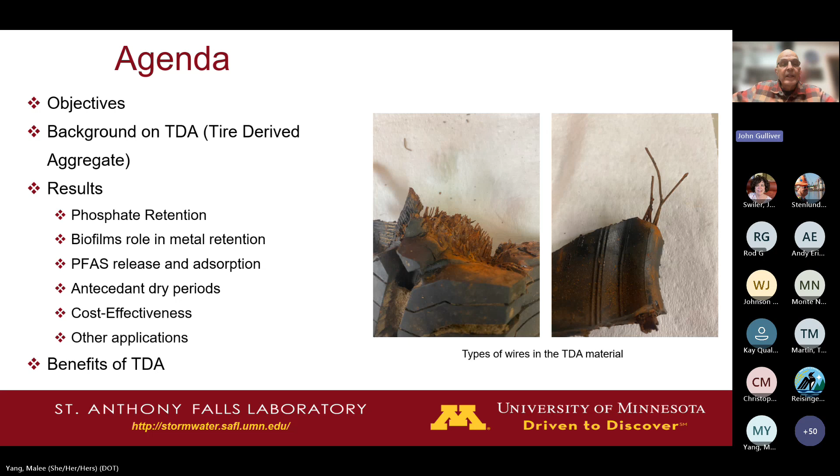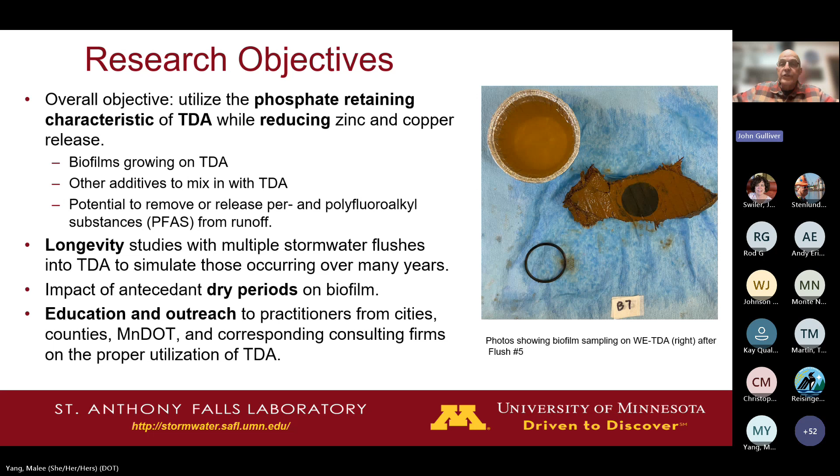So our objectives, we wanted to utilize the phosphate retaining characteristics of TDA while reducing zinc and copper release with biofilms growing on the TDA. They just grow when they're in water. Other additives to mix in with TDA, I'm not going to talk about that today because we didn't need other additives. And the potential to remove or release PFAS from runoff. We did some longevity studies, studied dry periods on biofilm, and then education and outreach, which this is a part of. Next, please.

So tire waste. In the USA, we throw away about 300 million tires per year. And we don't want them to end up in a dump like this here. And so we try to find other uses for them. When I get to it, there's a surprising aspect to the cost effectiveness because most of it is in not sending the tires to the dump.

So it affects the landfill cover because it rises, traps gases like methane and becomes hazardous. And tires also need a lot of volume if not shredded and compacted. So there's a lot of reasons to shred the tires. And then there are good things that we can do with them after we shred them. We can replace aggregate. And then it turns out that they are an aggregate replacement that actually retains phosphorus. It'll collect the phosphate. Next, please.

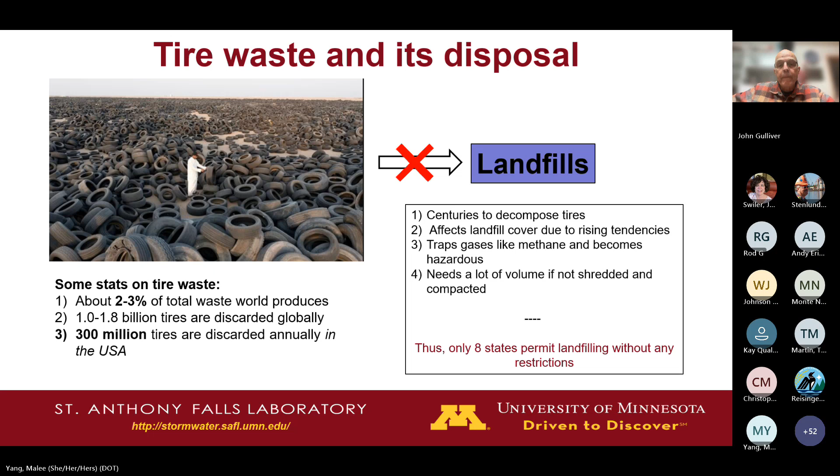So the benefits of TDA placement in underground chambers. They have a high porosity, roughly 50% porosity with tire-derived aggregate. You can see some here at Walters Recycling and Reuse in Blaine. It converts tire waste into a useful resource. It has low maintenance needs because it's underground and there's really not much that can go wrong with it. It's low cost and it's lightweight. These are the advantages that people knew about before this research study. Next, please.

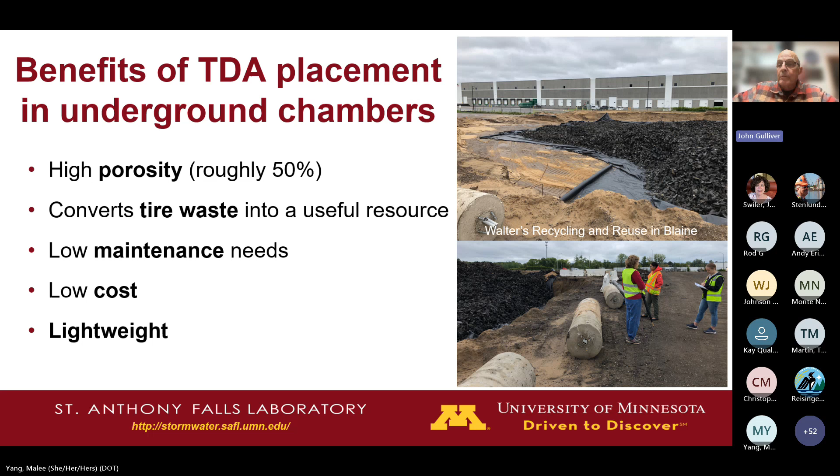The types of TDA studied were really tires chopped into between 2 and 6 inch pieces. You can see some pictures here of the traditional TDA and then a TDA byproduct that we worked with called wire-exposed TDA. There's no use for this TDA byproduct currently, and it's TDA with too many wires poking out of it, and they don't want the wires to be in the TDA mixture because it will poke through impervious films and things like that. So that's what we used. It's normally used in dry locations. We're talking about using it in wet locations, underground chambers to collect stormwater. Next, please.

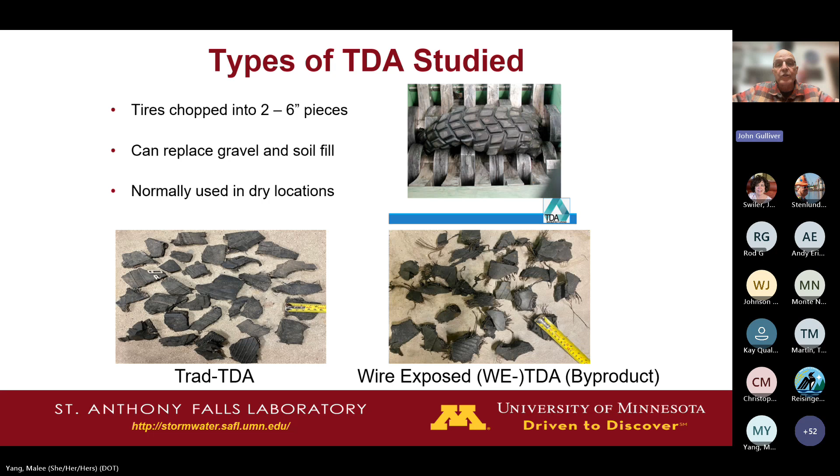So our research results. Well, we had a bunch of buckets filled with TDA, with replicates and different treatments. On the right, you can see TDA in the buckets after a certain number of flushes. So we would put water in the TDA, kind of simulating what happens in an underground storage chamber or an underground infiltration chamber. You put water in, the water drains out slowly, and then it's dry for a little bit. We had 4 flushes on the left of the right-hand set of pictures, 6 flushes in the middle and 10 flushes on the right. You can see how the biofilm is growing. That's basically a slime layer. Next, please.

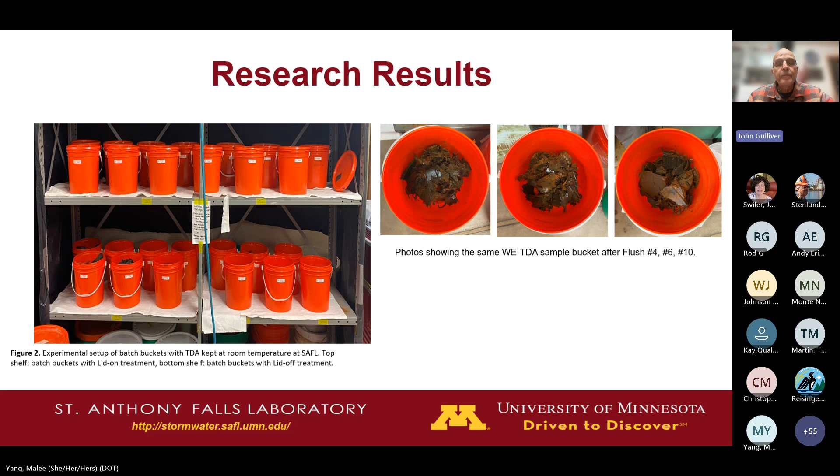So in terms of phosphate retention, we did a pretty good job with our TDA. We put in phosphate, and you can see the controls are at the top. The y-axis is C out over C in, and on the x-axis is the flush number. So we'd put in a flush, and then we would watch it for 72 hours, and then we would leave it for 2 days and then do another flush. So it's a long-term study.

And you can see that the C out over C in is about 0.2 for most of the treatments. That would be wire-exposed TDA and traditional TDA. We did a lid on and a lid off because we weren't sure how much exposure to the air occurs in these underground chambers. So we did both, and they both worked pretty well.

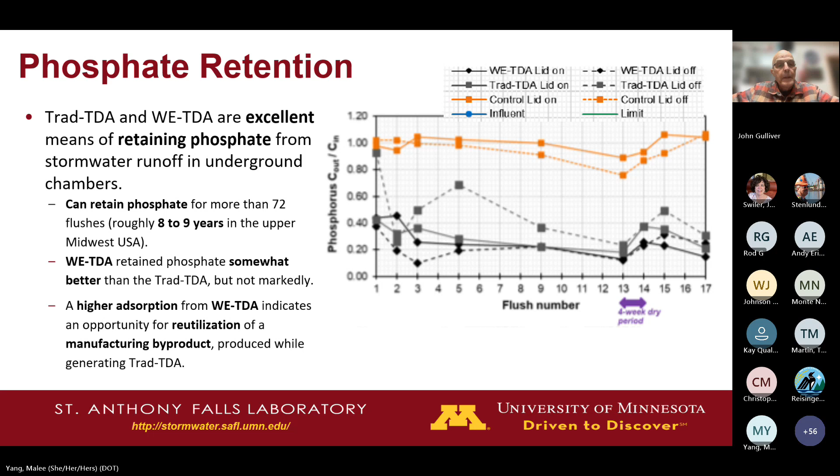The biofilms. The biofilms growing on the TDA will retain much of the zinc, copper, and iron that's released from the TDA. We found in a previous study that TDA can release these 3 metals, but the biofilm growing on them will capture the metals that are released. And so we had virtually no metals in the effluent of these

flushes. And the biofilm growth is a little bit interesting. It's pretty constant between the different flushes. It stays pretty constant. There's one TDA, traditional TDA with the lid off, which has lower biofilms, but then at the end it has the highest biofilms. We did a 1-month dry period. We did a 2-month dry period.

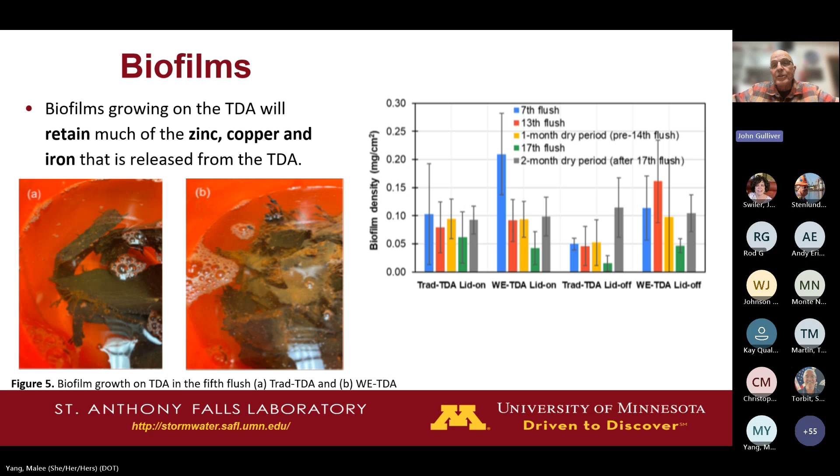The biofilm lives. If you've ever tried to get something out of your shower, you know that the biofilm always comes back. You have to work hard at it. And that's really what this is. It's always there. Next, please.

So the biofilms do a good job. The toxic limits are in green, and the response of the biofilms for the various treatments are in the symbols. And the influent comes in at virtually 0 zinc, but there's no leaching or a very little bit of leaching, a small amount of leaching. Iron probably had the most leaching, but iron is really not something that the MPCA and the US EPA are that concerned with. It precipitates, and it probably comes out as a solid, so it's really not harmful.

But the zinc and the copper are, and they are below the limits set by the EPA and the Minnesota Pollution Control Agency. So biofilms do a good job.

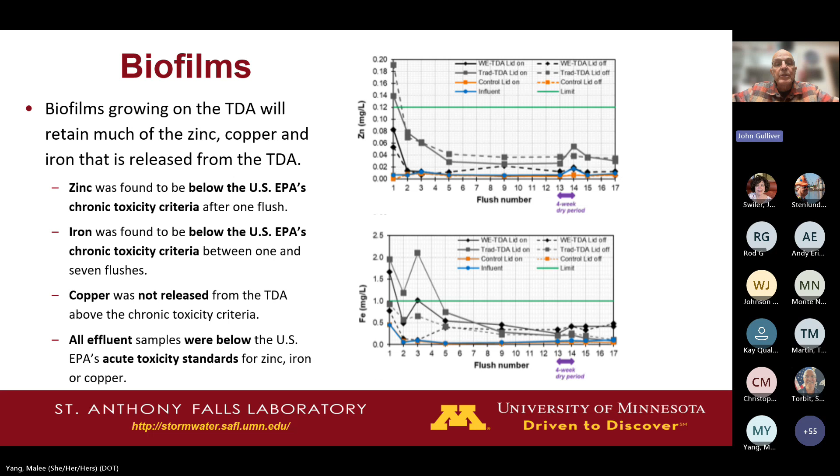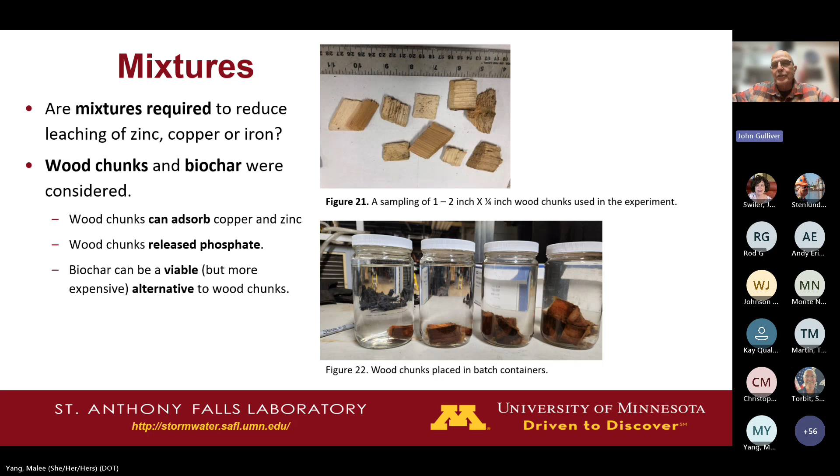Dry periods. The biofilm was not affected by a 2-day antecedent dry period. A 1-month dry period reduced biofilm, but it grew back quickly. A 2-month dry period seemed to increase the biofilm. So there is uncertainty in the response of the biofilm, but it's always there and it's always growing. Next, please.

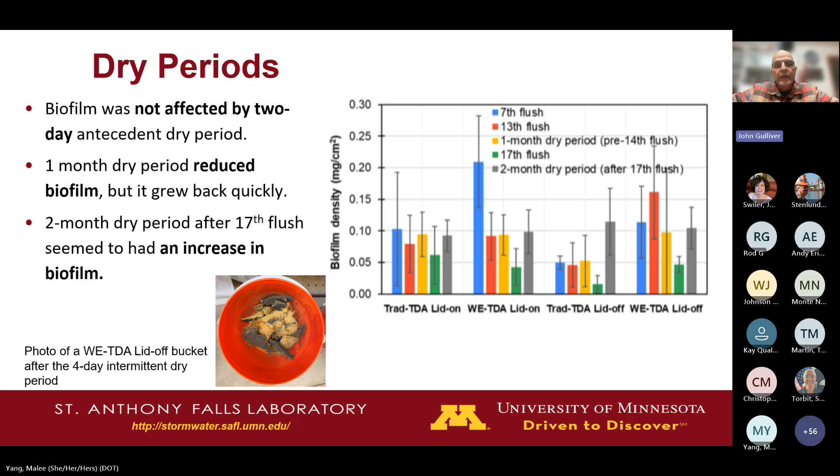Cost effectiveness. Well, most of the benefit is in the fact that we aren't sending the tires to the dump. We're doing something useful with the tires. The value added is $273 per ton. The disposal of tires costs $240 per ton, and we're not disposing of the tires. To purchase TDA, it's actually fairly inexpensive. And you can see it's used here as a replacement for an aggregate around an underground infiltration basin.

And the other thing is that this is one of the only 2 methods out there in Minnesota that can be used to remove phosphate. And phosphate's an important chemical. It's important for us to limit the phosphate release because phosphate is the limiting nutrient for algae in ponds. If you have too much phosphate, you have a green pond, a green lake, a green river, and that's not something we want. And so we want to control phosphate because it's a limiting nutrient.

They have enough nitrogen, enough of everything else they need, enough potassium. All they need is phosphate, and they'll grow like crazy. We don't want them to grow like crazy. We want a kind of a clean water body. The way to do that is to remove phosphate. And right now we can only do it with an iron enhanced sand filter. This is another technique that can be used. So I think that's my last slide.

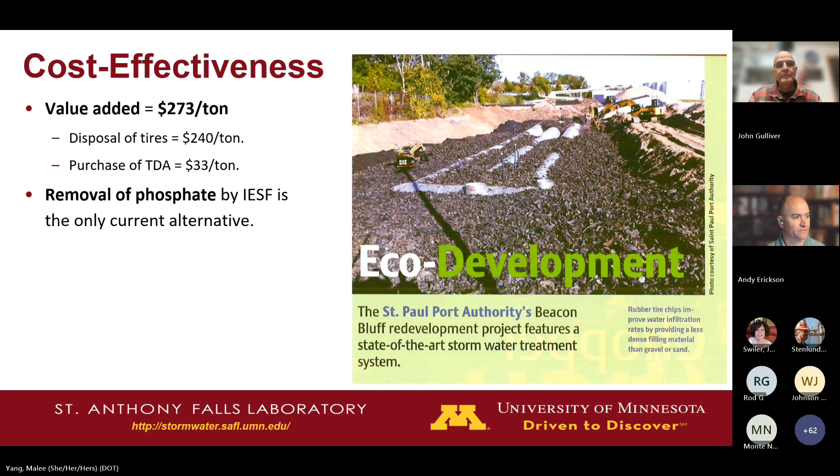I'm going to talk about updating the Minnesota Stormwater Inspection and Maintenance Resource Guide.

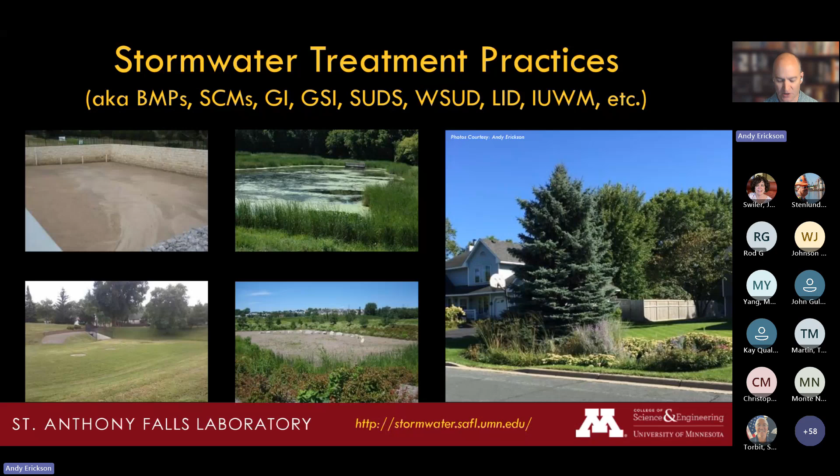But we use a lot of different types of nomenclature in the stormwater world, and oftentimes some are used interchangeably and possibly incorrectly. And that creates a lot of confusion amongst the stormwater professional world. So one of the things we tried to do with the manual that I'm going to talk about is be very clear and specific about what we're talking about. What is a biofilter? What is a bioinfiltration practice? What is a filter? What is a wet pond? What is a dry pond, etc. So nomenclature, terminology is very important in this world.

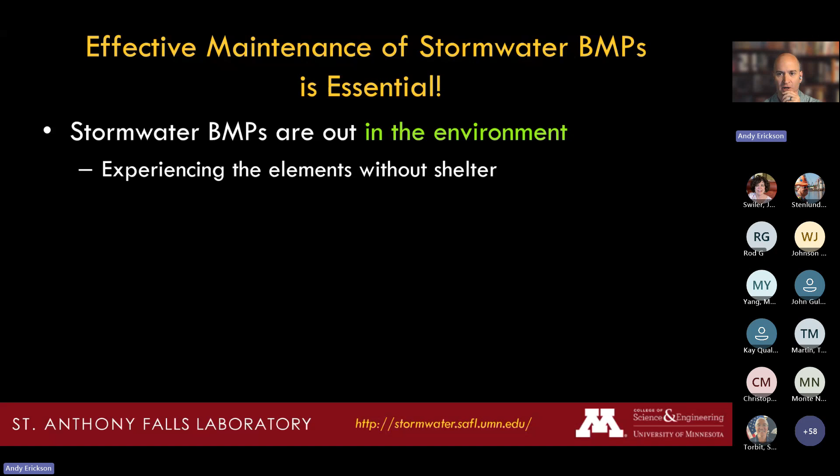And I probably don't need to explain this to this group, but our stormwater treatment practices, or BMPs as they are often called, are out in the environment. They're in nature. They are not protected from the elements. And Mother Nature can wreak havoc really on many of these things. So that is a challenge when we're trying to think about how to keep these practices working long term, and why effective maintenance is essential.

There are many different types of stormwater treatment practices, as I just showed on the previous slide. They come not only in many different types, but many sizes, and the sites into which we install them are all different. So there's many variables that go into each individual stormwater treatment practice, and then the maintenance to keep them functional must be specific to that site and that treatment practice.

And something we rely on pretty regularly is for our stormwater treatment practices to operate independently. These are passive treatment systems. We build them and then we walk away. We let them sit out in nature and they do their thing. They don't have an operator that's standing by. They're not in controlled conditions like a wastewater treatment plant or a drinking water treatment plant. There's not all kinds of gauges and valves and dials we can turn to optimize performance.

They are passive systems installed in the environment in a variety of different ways at a variety of different sites, and we are expecting them to function long term. That assumes effective maintenance. We all know without maintenance, things fail. If we don't maintain our vehicles, they're going to break down. If we don't maintain our homes, things are going to break. The same is true of our stormwater treatment practices.

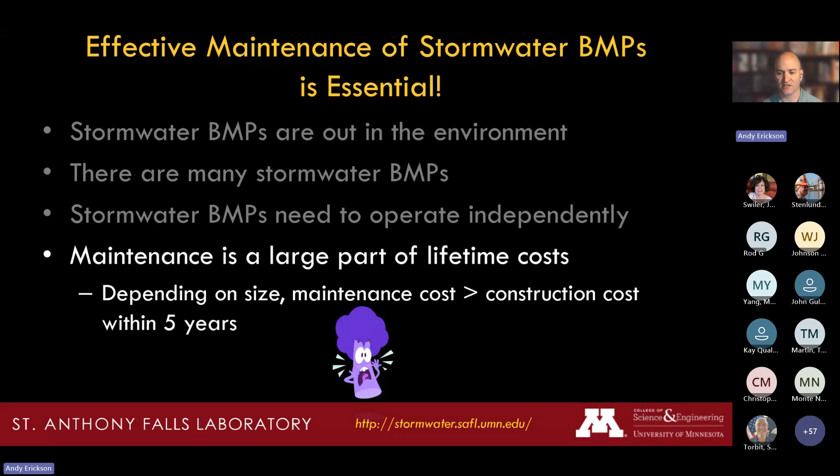But you might ask, why do we need a stormwater inspection and maintenance resource guide? Isn't all of this information already out there? And you might look to the Minnesota Stormwater Manual, which is the standard for design guidance in Minnesota. It also includes all of the regulatory requirements for Minnesota as it relates to stormwater management, and it does include

maintenance guidance. However, some of the feedback we've heard from stormwater professionals and especially MnDOT, who funded this work through the Local Road Research Board, and the Local Road Research Board staff, it can be very hard to find exactly what you're looking for in the Minnesota Stormwater Manual. There's something like 1,600 individual pages of the manual. So when you're looking for maintenance of a rain garden and you're really focused on phosphorus removal, it can be somewhat hard to find that specific piece of information.

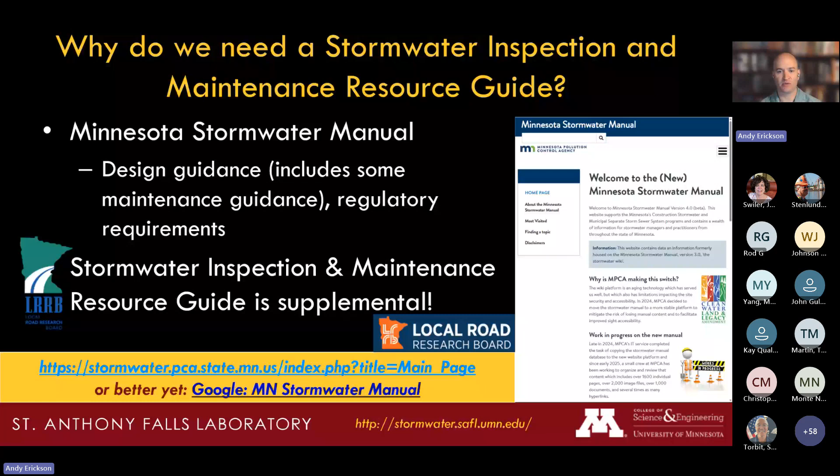And that's why the Local Road Research Board funded a project to build a specific stormwater inspection and maintenance resource guide. And ideally, a clear, concise resource guide that people can use and find what they need very, very quickly. So what is operation and maintenance? And again, maybe this is familiar to you, maybe it's not, but the terminology is important. And that's why we want to define some of these terms.

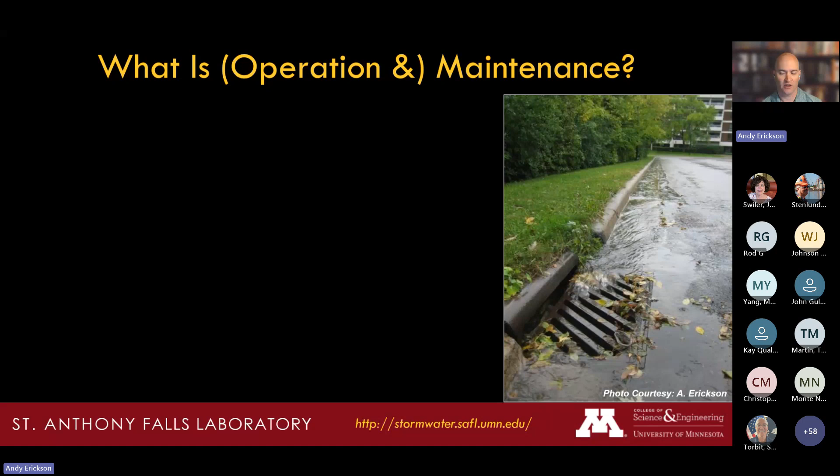When we talk about inspection, we are talking about very quick, simple, visual assessments to select and schedule maintenance. We want to know what's wrong with the practice, and we want to know what maintenance is needed to fix it. That is inspection. That is its purpose. It also is intended to be very quick and simple, and actually low training.

When we get to the inspection forms at the end of this document, you won't get to see the entire form, but we devised these forms so that you could train interns, summer interns, to go out and do these inspections for you and really collect a lot of data very quickly, possibly for all of your stormwater treatment practices within your jurisdiction. That is the ideal, that it's that quick, that simple, and it's a visual assessment.

An assessment actually can go beyond inspection. You can actually do additional measurements to help refine and further select and schedule your maintenance. But you can see that both of these are geared at the maintenance. The maintenance is the key piece because those are the activities that are ensuring the proper function and extending the usable life of our stormwater treatment practices.

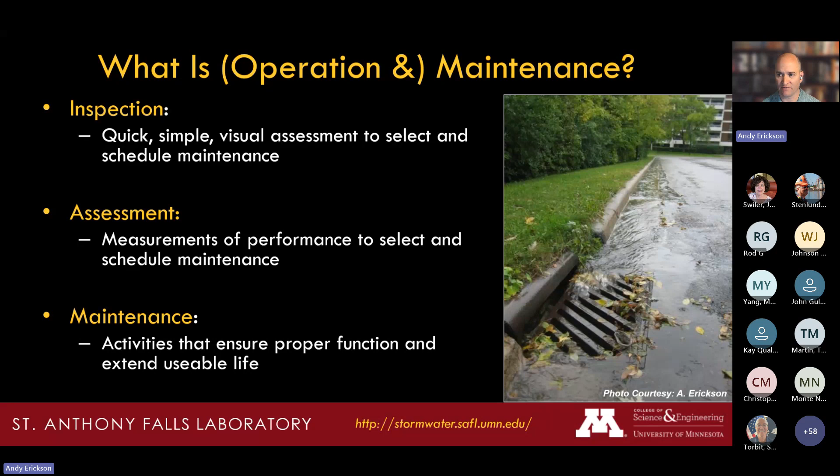So ideally, we can do quick, simple visual inspections to select and schedule maintenance. We can also determine if we need additional, more rigorous assessment, which is a measurement of the performance, to select and schedule maintenance. And then we recommend maintenance to then correct any issues that we might find in order to extend the life and ensure the proper function of these treatment practices.

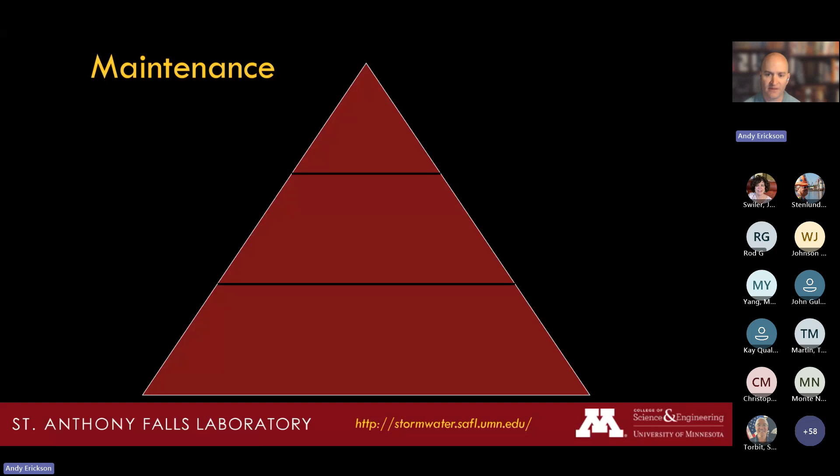Now, when we talk about maintenance, we've broken maintenance up into 3 categories. And I think of it like a pyramid because foundational to all of our maintenance is routine maintenance. This is relatively regular and relatively frequent maintenance. These are things like doing your visual inspections. That should be a regular occurrence and it should be relatively frequent compared to other maintenance that we'll talk about shortly. It might also include litter and debris removal.

It might include vegetation and ground cover management. Again, almost every year the vegetation grows up pretty well and you need to maintain that in order to make sure you have the right vegetation in place, the vegetation is where it belongs and not where it doesn't belong, that the vegetation is not preventing you from doing critical maintenance on your practice. So that is a regular and relatively frequent routine maintenance activity.

But then above that is what we would call non-routine maintenance. These are things that are triggered by specific observations. These are, if it's broke, then you go fix it. And if it's not broke, you don't fix it. That's what non-routine maintenance is all about. It should be, ideally, in an ideal world, relatively infrequent and certainly irregular. We don't expect to do non-routine maintenance every month or every season or even every year. It should only happen when it's needed.

Now, if some non-routine maintenance, such as structural repairs, are needed on a relatively frequent basis and are pretty regular in their scheduling, you might want to look at the cause of that. Especially structural repairs like flared end sections or inlets or outlets or things like that.

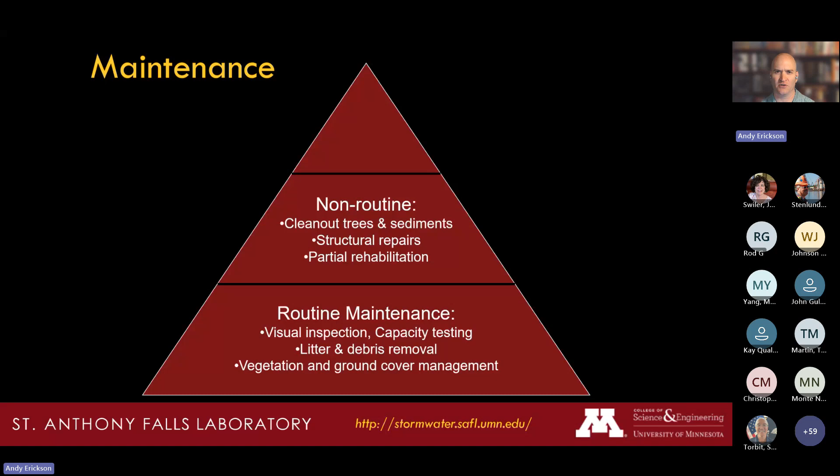If they're getting damaged, if something like that is occurring and you need to do some real structural replacement, look at that and find out why and adjust the cause. It will significantly decrease your maintenance costs if you can focus on your routine maintenance and only do non-routine maintenance when you need it at a relatively irregular and infrequent basis.

When we put these together, we have what we call preventative maintenance. If you're doing your routine maintenance and you're triggering your non-routine maintenance when you need it at the appropriate time, you're not coming in way after it needs to be done, ideally, you're going to prevent the major maintenance, the complete rehabilitation or complete rebuilding of the practices, because this is where most of the cost will come in.

If you have to rebuild a rain garden or a sand filter or even a stormwater pond, it's very expensive to rebuild it because it's a retrofit at that point. The project is done and the contractors are long gone. You have to come in and try to rebuild that practice within this relatively confined, limited space. And that's often way more expensive than the original construction.

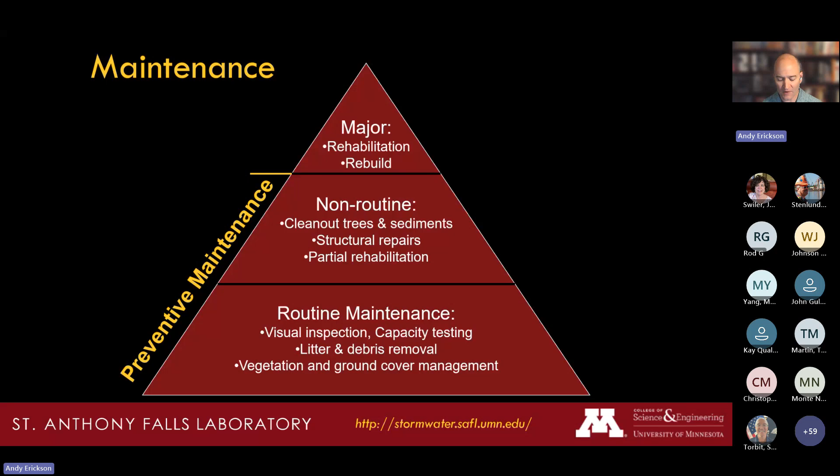So if we can prevent our major maintenance activities by doing our regular routine maintenance and our irregular non-routine maintenance, we're going to save a lot of money in the long run, and these practices will perform more consistently for their entire lifespan. So what did we do with this inspection and maintenance resource guide? We actually have a number of sections in the guide because there are a number of stormwater treatment practices.

We did build upon past learnings and past research that we and others have done, but we also added new practices. Since some of the prior maintenance and inspection guidance has been published, there's some new things going on in Minnesota, and we need to address those with good guidance on inspection and maintenance.

When we talk about ponds and wetlands, floating treatment wetlands are a new practice that's being installed, and people are wondering, how do I inspect this? How do I maintain it? What do I need to know about these that's different than some of our other treatment practices? In addition to our constructed stormwater ponds, our constructed wetlands, those are a new practice.

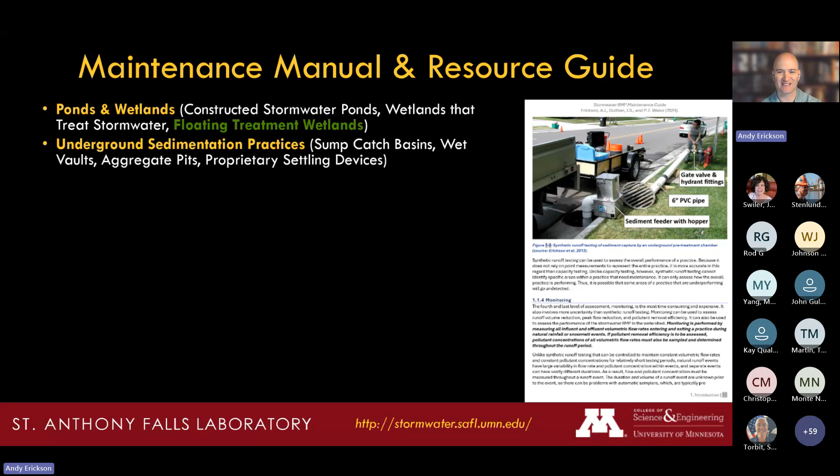When we talk about underground sedimentation practices, things like sump catch basins, wet vaults, aggregate pits, proprietary settling devices, we have inspection and maintenance guidance there, although many of the proprietary products come with their own maintenance guide that's specific to that proprietary unit. Thinking about infiltration practices, things like infiltration basins and rain gardens, the implementation of MIDS has driven, and even prior to MIDS, many of our practices are now infiltration practices, and they need unique maintenance and inspection activities to keep them functioning.

One of the recent advances or new technologies that we're seeing in many of our urban landscapes are tree boxes and tree trenches. How do you inspect those? How do you maintain those? Filtration practices, again, there's been a number of filters, and in fact, we've been using filters for thousands of years to treat water, not necessarily stormwater, but to treat water.

But the more recent advancements are amendments to sand filters. Things like the iron enhanced sand filter or a biochar enhanced sand filter. How does inspection and maintenance change for those amended sand filter products? And what do we need to know differently about those types of practices?

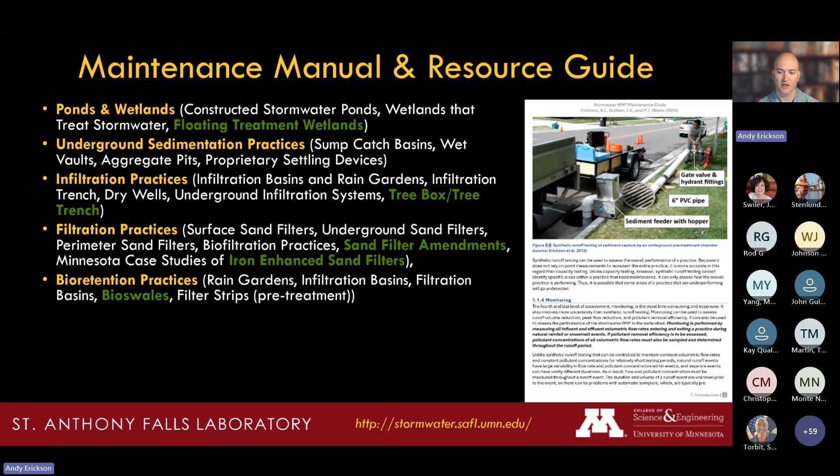Bioretention practices or biologically enhanced practices. These are practices that really rely on vegetation to help with the function. Things like rain gardens, bioswales, even some infiltration basins that are more vegetated than maybe sandier ones. There's a little bit different inspection and maintenance because the vegetation is very important. So we need to inspect the vegetation. We need to select maintenance activities that are appropriate for the type of vegetation that's intended to be there and where it's intended to be.

Full depth permeable pavements. So that's also kind of a category of products that are relatively newer in Minnesota, at least in the last 1 or 2 decades. We have a lot more permeable pavements in Minnesota than we did prior to that. So whether it's pervious concrete, porous asphalt, interlocking concrete pavements, or block pavers, there are inspection and maintenance guides for that.

And another new one is stormwater harvesting. So we are using stormwater harvesting and reuse for a variety of different end uses, whether that's flushing toilets or irrigation. Inspection and maintenance on that is a little bit different. However, many of those are very site specific.

They are designed specifically for that location. And again, many manufacturers or installers will provide a maintenance guide with it, but we have some case studies of what that looks like if you're interested before you make a decision to go that direction.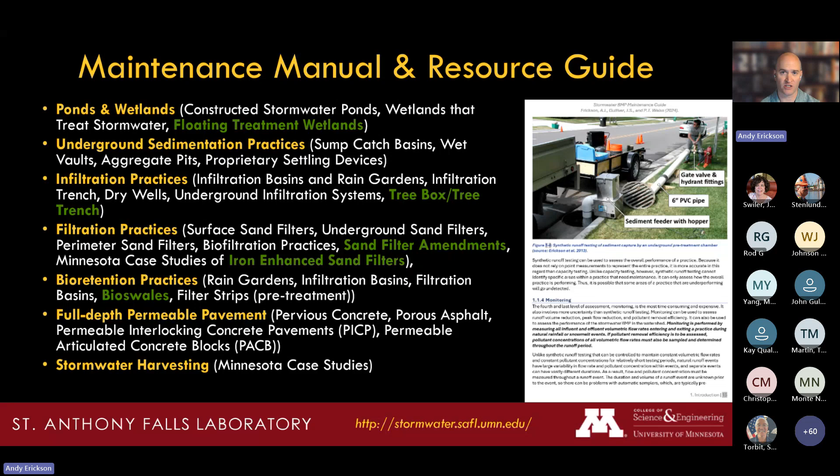Now, in each of those sections, those are different types of treatment practices and how we generally have it organized. In each section, we talk about the benefits and the limitations of those practices. We talk about the different assessment activities. How is visual inspection different? What are some additional assessment methods you might incorporate when needed? For example, capacity testing or synthetic runoff testing or even field monitoring.

We also talk about the factors that affect performance. In other words, what are the maintenance triggers? Why is maintenance often needed on these types of practices? And that is different based on each practice.

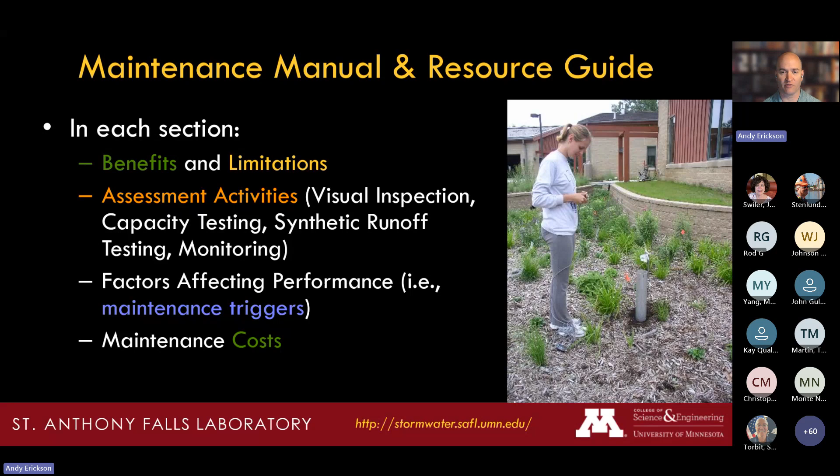And then I think what a lot of people are super interested in is how much is it going to cost? I think a lot of our budgets at the municipal level, even the watershed district level, anywhere that people are maintaining these things, it can be a little difficult to come up with good numbers of how much you think maintenance is going to cost. We've pulled together the literature, we've pulled together the research, we've synthesized that down into some projections so that you can put those into your budgets and hopefully provide plenty of money to do the most appropriate maintenance for your practices.

Another new section in this maintenance guide that's different than other guides is what we call meeting stormwater management objectives from the inspection and maintenance perspective. And what I mean by this is if your goal is blank reduction, whether that's sediment, phosphorus, metals, organics, or pathogens, your inspection and maintenance might be different.

So we have a section on meeting stormwater management goals where you can go in and say, I'm going to look at phosphorus because that's my primary goal in my particular watershed, or for these particular stormwater treatment practices. I'm going to go there, and then this section is going to tell you what you need to focus on in terms of inspection and maintenance for XYZ practices or activities. So a little bit different perspective, but I know a lot of our stormwater practitioners are coming from that perspective. They might not even know how to choose what practice to use. This can help you go that direction as well.

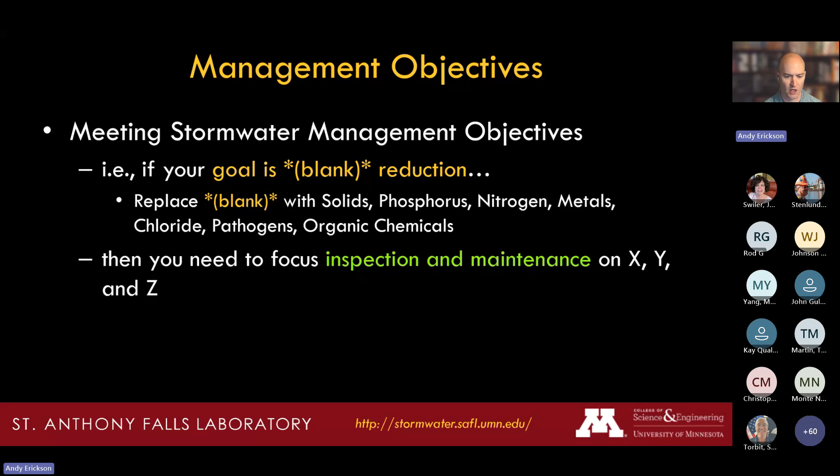So to give you a glimpse of what it looks like, we developed inspection checklists. Again, these have been around. We've revised them and updated them with the most recent state-of-the-art and state-of-the-science information on inspection and maintenance. They look something like this. They are a PDF fillable form. You can print them and write on them. You can have them on a tablet or a computer, and you can type and tap and checkbox to make it work. You can also upload photos and things as needed.

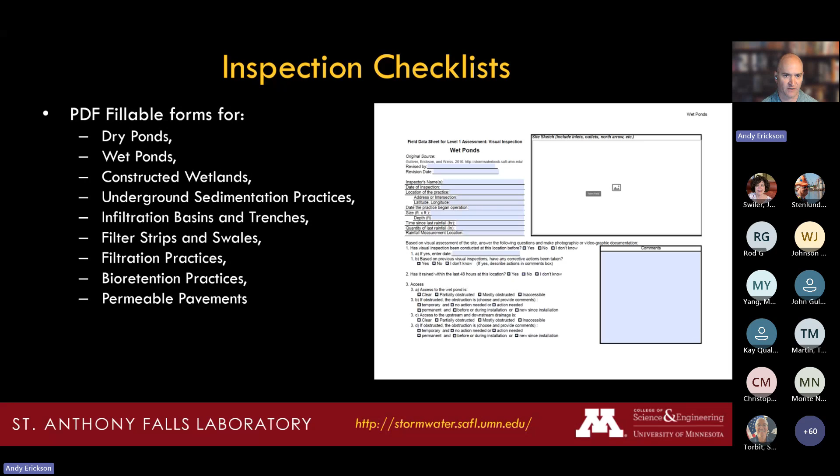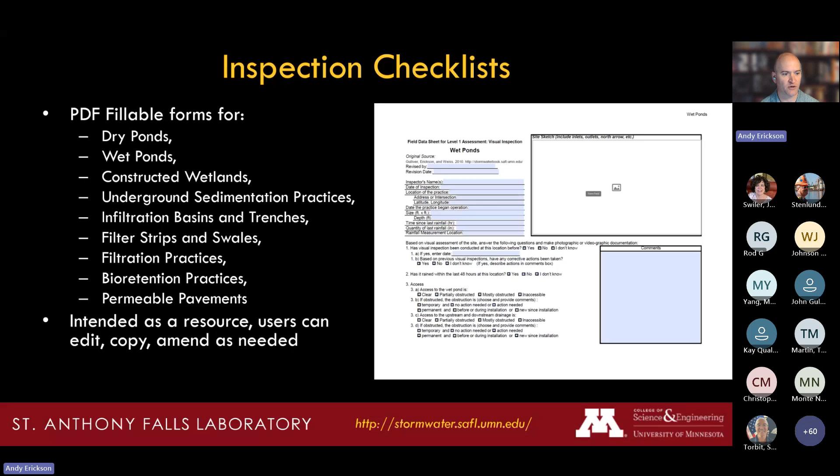And we cover all of these different types of practices. Again, some of the ones we've already talked about before. We have an inspection form for each of these. This is intended to be a resource for you. So if it doesn't match exactly what you need, if you need some other information, or if there's questions here that really don't apply to you, that's fine. Take them out, skip them, add to it. It's meant to be a resource. You are welcome to take them and change them however you need to. All we ask is that you give us credit as we originally developed them, but they are intended for you to use them, and they are freely available.

Going along with the inspection checklist is once you fill out the form, you might not know, well, what do I do with this? I've checked it, I've filled it all out, I've identified all these things. What do I do now? We have maintenance tables, maintenance activities. So for each question in the form, you go to the section in the maintenance table of that question, and you say, okay, I answered this on this question for my inlet structures. They were clogged. We see some spalling of concrete. Then it tells you the maintenance activities to do to fix that problem. So you can know almost nothing about these stormwater treatment practices, and then this literally will walk you through step by step from inspection to recommending maintenance activities.

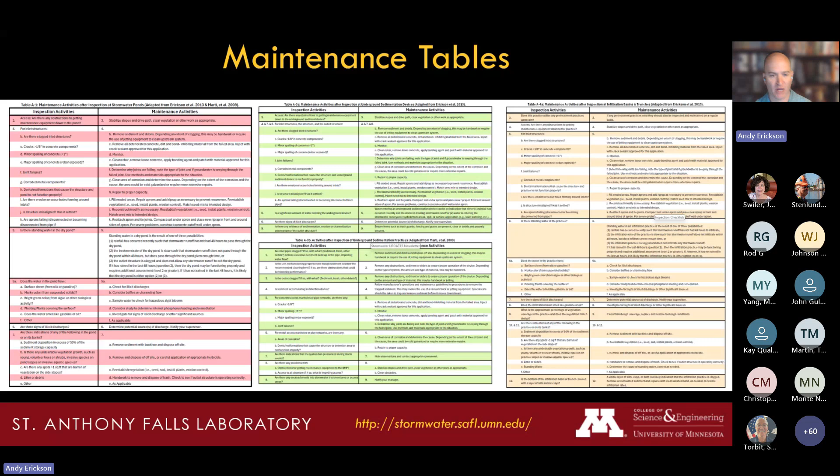We cover a wide variety of stormwater practices. We cover inspection, assessment, and maintenance resources. There are PDF fillable forms, and we talk about the maintenance triggers, the activities, and the frequency and cost of these maintenance activities. So let me drop this link in the chat.

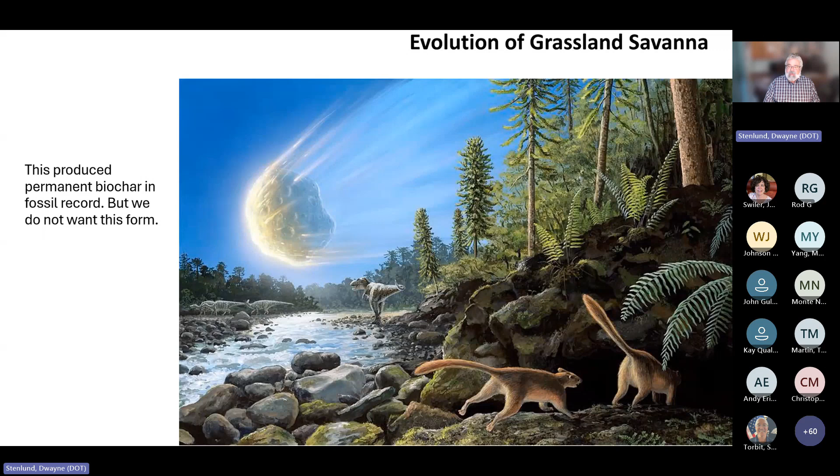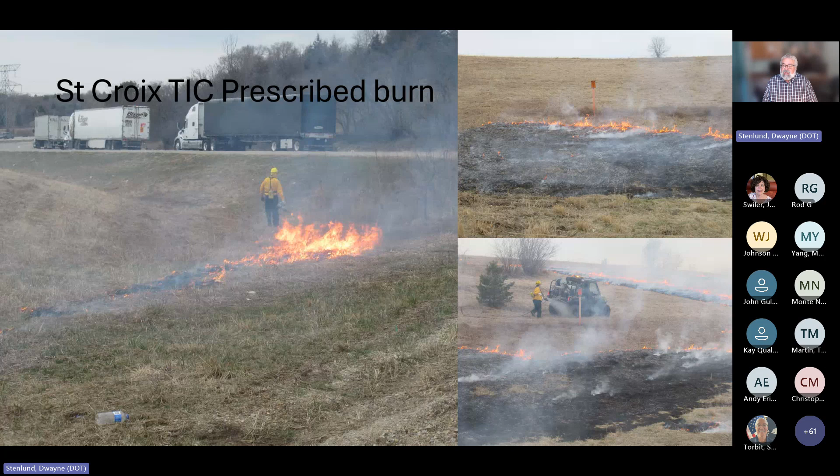So this is just an example of the St. Croix Travel Information Center where we do burn. This doesn't necessarily make biochar, but it does help maintain healthy environments. So if I can't burn, could I add something else that mimics a burn? And that's where the biochars could come in. So what is it? It's basically defined as a thermochemical conversion of biomass in an oxygen-limited environment.

So what you have left is cells. So these would be a great way for making biofilms. This is bacteria apartments, is how I look at it. It will retain water. It's good for heavy metals. I'm hoping that it'll be good for 6PPD-quinone, the quinones off of tires. We don't think it does much for phosphorus. We don't think it does much for PFOS, but it still might create the environment.

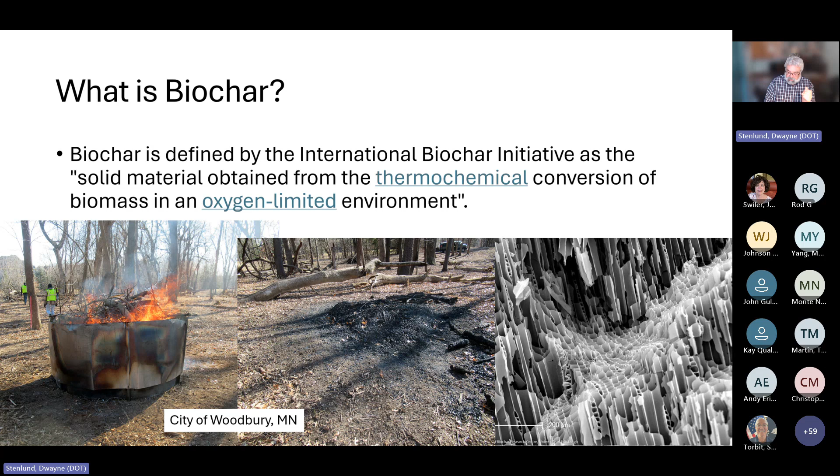So this is in the city of Woodbury. We know an awful lot about this. You can make them yourselves. Instead of having campfires, have a biochar fire. And the city of Minneapolis is in construction right now to deal with some of their wood waste material. It's currently in construction. This is the Gopher Stadium, and this is where the facility will be located.

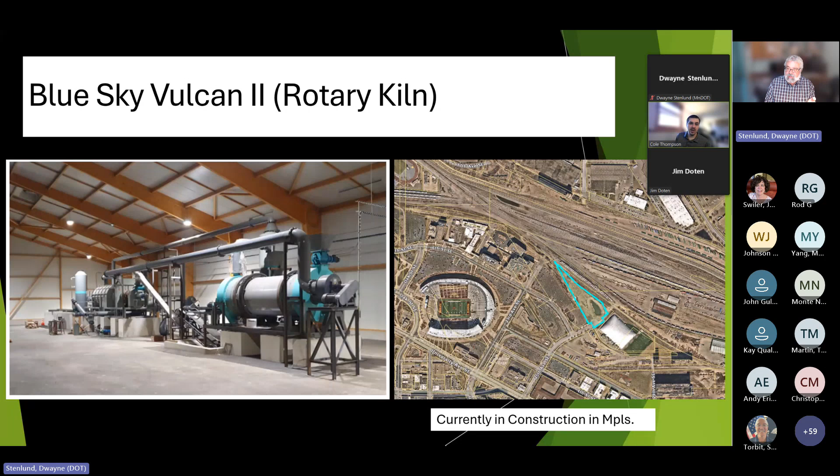And I think it's really important that they're creating a system that they hope to use all the material that they generate. And there's a value for this. Just an example of the equipment, it's not a big deal. This is something I saw at the Biochar conference. This can produce 12 tons an hour. And why is this a big deal?

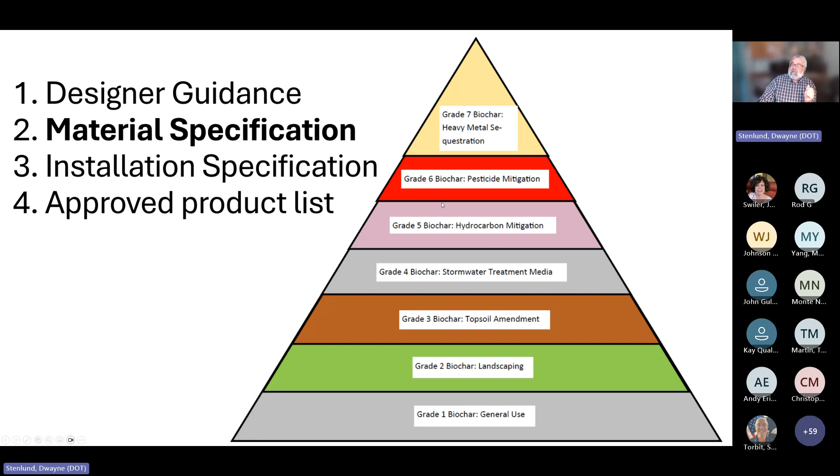Well, I need to make sure that I have standards. And I don't know exactly what it'll look like in the future for the standards material specification, but I hope to be able to use it for general use, and that would include carbon offsets during construction, landscaping, topsoil, stormwater, certainly hydrocarbon mitigation, heavy metal sequestration, a whole bunch of really neat things. That's why this is really quite exciting to me.

So the first round of research, called phase 1, was to basically characterize the char. Because right now, anyone can say anything about anything and say, nope, mine is 600-degree char, and they don't really know. So this is a way of defining certain temperatures and verifying that the material works as stated. Because we need to solve a problem, and it can't be just because someone wants to sell it to us.

So I really am trying to use local materials. That would be black ash, hardwoods, but it doesn't mean softwoods can't be used. And by the way, it could be used for just about anything organic, whether it's agricultural waste or waste that would normally go to a landfill that would produce methane and other materials. So we are hoping that we can generate something. But I'm starting off with hardwoods because it's really complicated to look at all biochars and say they're all equal. And that's the whole point here.

So these are some of the things that we're really trying to figure out: how do you have a product that you can test and have a uniform product that will perform in the way expected by the owner. The designers and the construction can install it. Construction can make money because we are a capitalistic system, and it can be measured by those that are out in the field by inspectors and engineers. So we want to make sure that we have a uniform material, that we have as large of pores as possible, and something that people can make on our behalf.

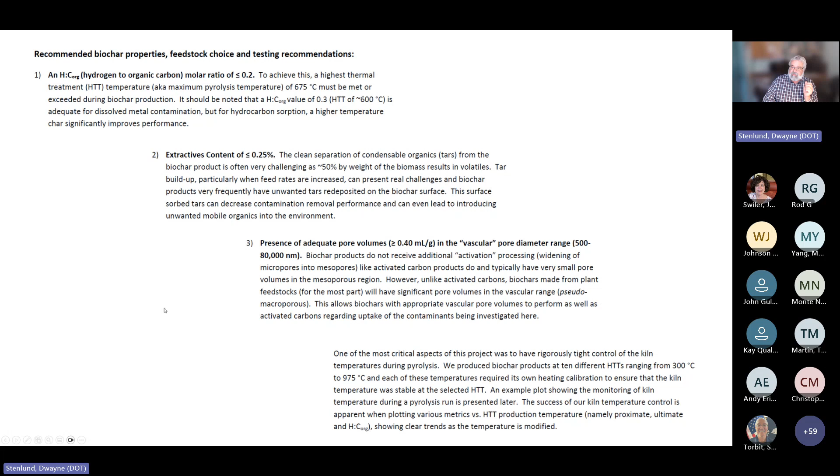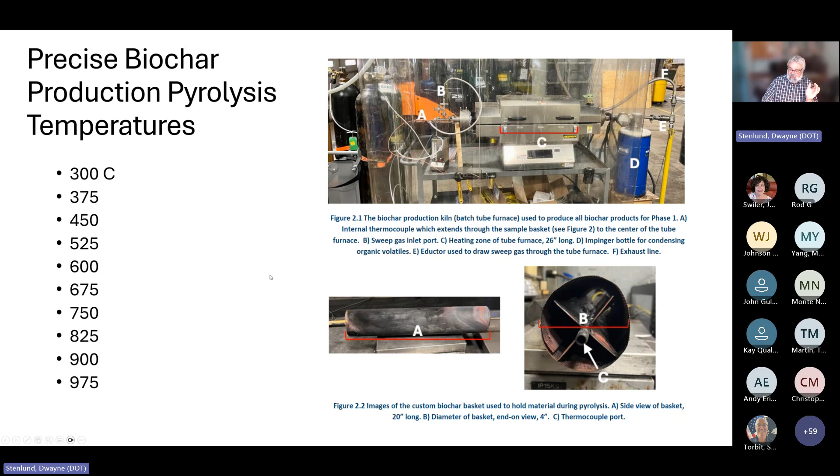So the research in a nutshell is we looked at a whole bunch of different temperature ranges looking for the optimum material. So this is a very precise biochar production system up in the Duluth, Hermantown area. And these are the temperatures. So we're really trying to find the right temperature that gives us the maximum values for solving something.

So we really want to make sure that we have, this is other research, but the idea that you have certain pore sizes that help us to, again, store heavy metals. Again, it doesn't do much for phosphorus, but it may do an awful lot of other benefits for rhizosphere organisms and so on.

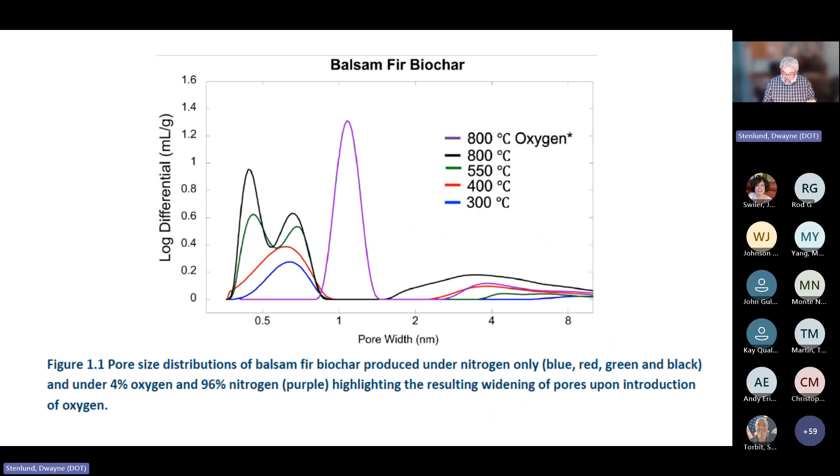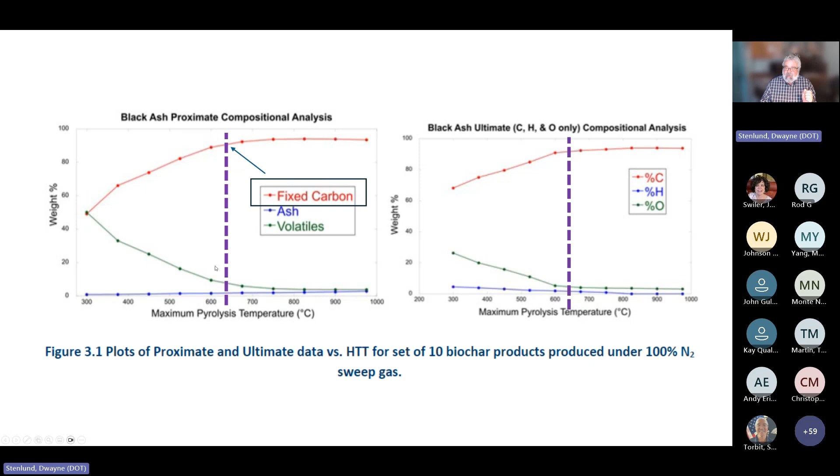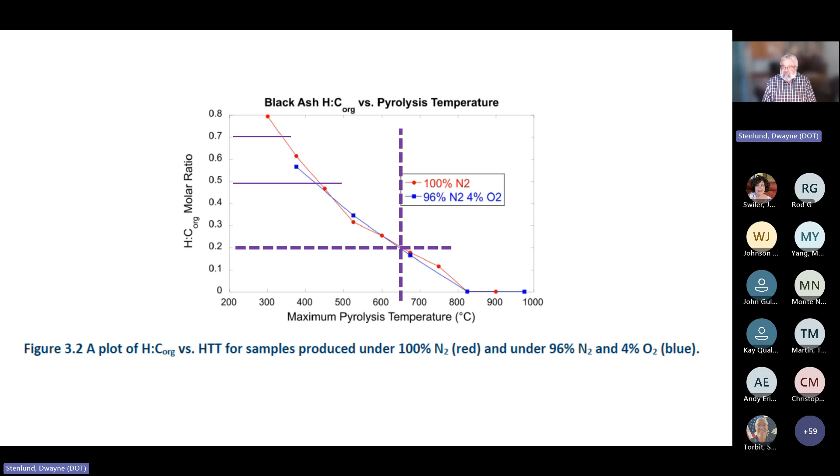So we're really looking for this value, and I'm going to start looking at 650 degrees because in almost all cases from the research, we want maximum carbon, minimum ash, because ash is a liming agent. That's not what we're looking for. So again, I try to put these numbers on the graphs of the final report of phase 1, and it really looks like 650 is coming out as basically a perfect temperature for a lot of different reasons.

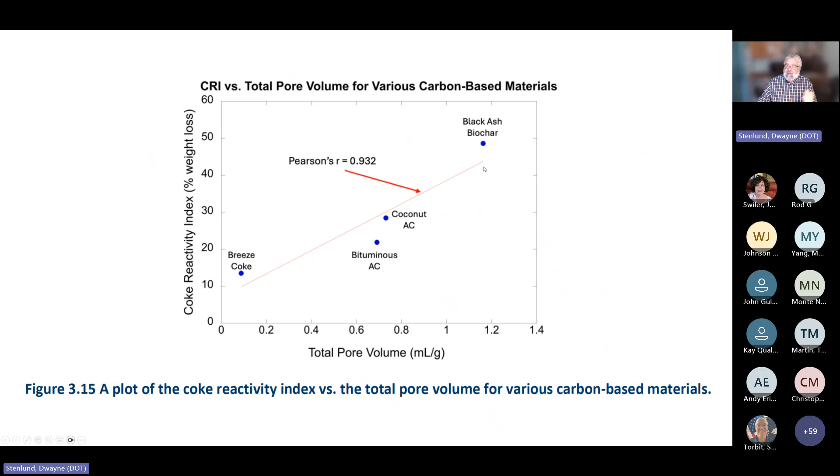And we don't know where all these other chars from agricultural materials, railroad ties, you name it, where they fit in this line. But we know black ash gives us a very good total pore volume. And this is why we're looking at hardwoods right now, because there is a black ash problem. And the data doesn't really matter, just that 650 comes out as a really good number.

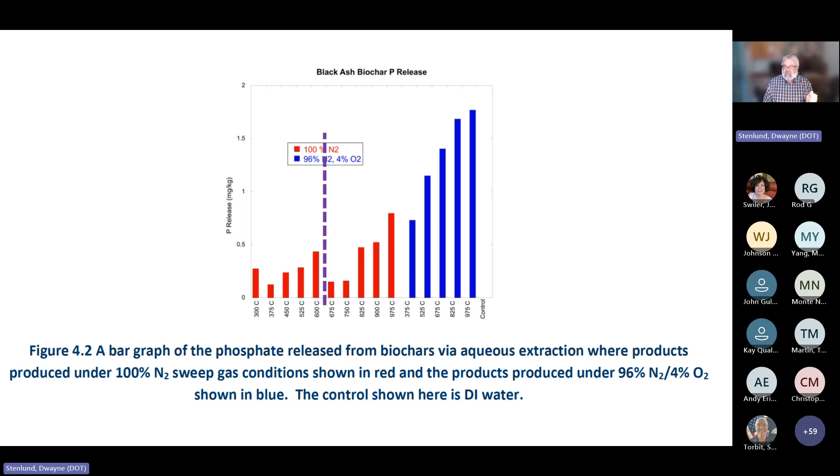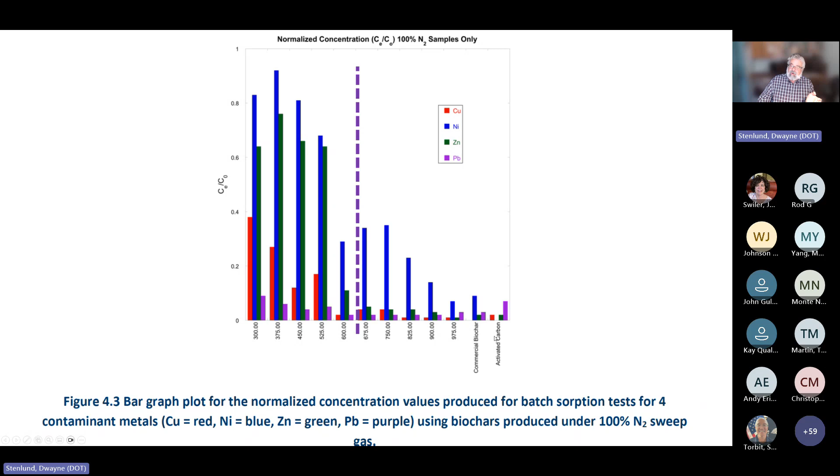And again, for water holding capacity, I believe this is carbon to carbon organics, but we're really looking at trying to make sure that we can get certain metals, copper, nickel, zinc, lead, and I'm looking at arsenic and other materials that will have maximum removal. So it's clear that not all metals react equally well to various temperatures or pyrolysis temperatures. And again, our goal is not to use activated carbon. That's certainly a benefit, but we're trying to use resources that we have.

Phase 2 is going further than that, and now that is to try to design gains. So phase 1 is to develop the material spec. Phase 2 is to find out does it really work, and then develop the design manual. So that's phase 1, phase 2. And this is what I've already developed for those that are interested. People are asking me like crazy, you got a spec?

So these are examples that are derived from phase 1, working with the university group, of carbon sequestration, basically a basic additive that would be road-based. You'd be surprised how this stuff is amazing as even concrete or Portland cement replacement. General additives, and this is where it would fall into my temporary sediment control. Nutrient enhanced additives, this might be for our landscaping community, trees, shrubs, and even native plants in stormwater boulevards. Stormwater treatment additives to do very specific things.

And believe it or not, it's used as a food additive. And I won't be regulating, but I do have a class for it already in case that's what the industry wants, but they're going to follow the FDA certification program, not anything that I would write. So it's the same material. What changes is the degree of testing. That's the results thus far.

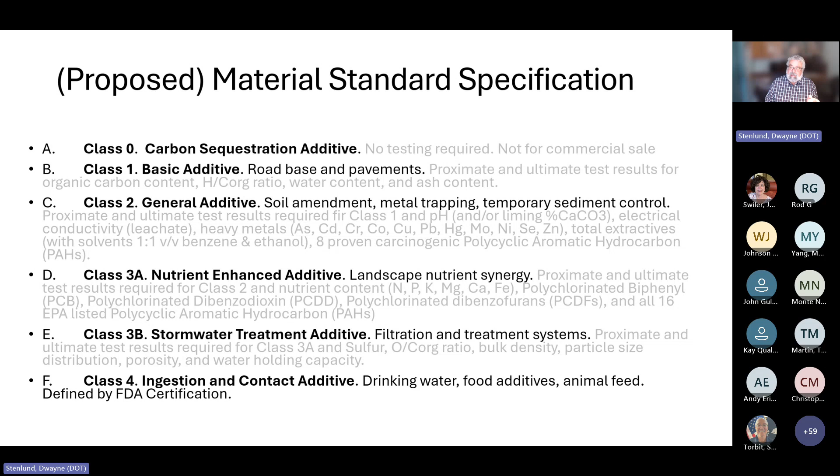So it'll still be hardwood, let's say. And so it's not multiple sources. It's hardwood, let's say black ash. And then the degree of testing. So as the testing goes up, the cost goes up. And so now, you can't read this, it doesn't matter. What it's to tell you is that I'm trying to find, does anyone in the world have a design manual? So if I've got a standard spec, now I need to figure out how to design for it to solve problems.

So DOTs even responded. So it's actually been a very good return on this investment. So this is a consultant through the research office again to find out is anybody anywhere using this stuff. So we've got Australia, various DOTs. It's been a really fun process that's not been finalized yet, and it doesn't look promising for a design manual, even though the United States Biochar Initiative is doing something. The Chesapeake Bay area is doing something. I just can't find much on it.

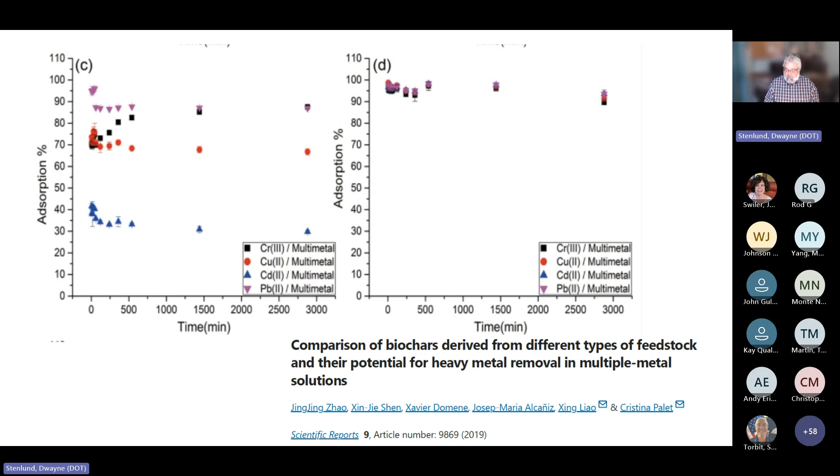But the point is, I really am interested in heavy metal removal and first flush off of the roads. And again, this biochar is quite promising. It's not universally promising for all metals, but it's really promising. So in the few minutes that I have left, and maybe I've already burned them up, I want to show you how I'm using it already. And that is for daily covers, filter logs, soil coatings, and soil covers when you're working in soils that have known contaminants.

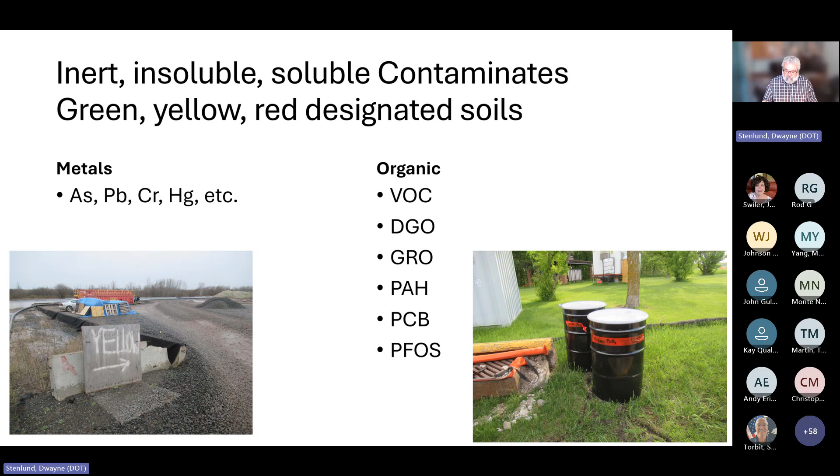And so in Minnesota DOT, we might have soils that have various heavy metals, and we'll have your green soils, yellow soils, and red soils. The red always go to some designated approved landfill. And then we've got a lot of other organics besides metals that might be in sort of called yellow soils. And how do you handle them during the excavation, temporary storage, and then final disposal or final reuse? And this is what I'm trying to get at.

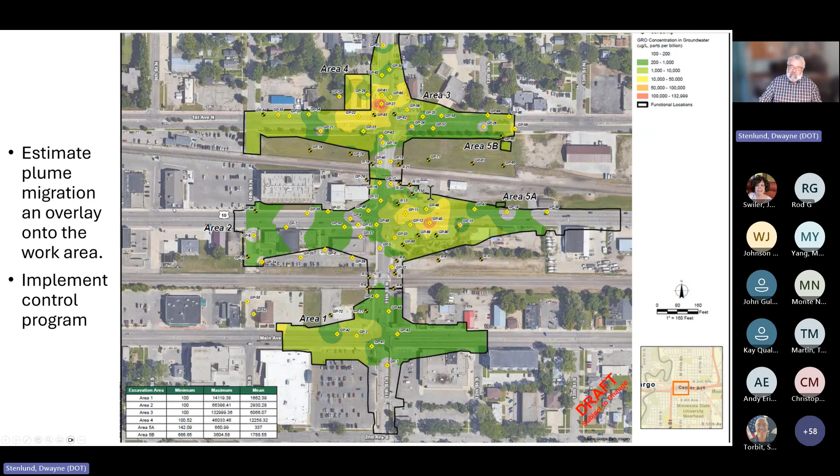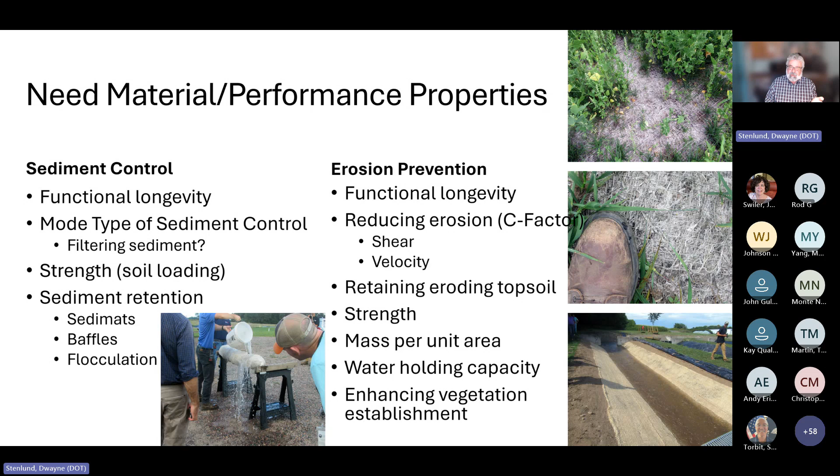So this represents Moorhead, and thank you, Kelsey, and others that are with us today, is that you have these various plumes. And today we're digging in places where I was on the project yesterday, and oh my goodness, some of the smells were just amazing to me. So what are we going to do when it can't fall back into our treatment system? So we need material performance properties. So it solves a problem. It's not just buying something, it needs to solve something. What's the point of the research?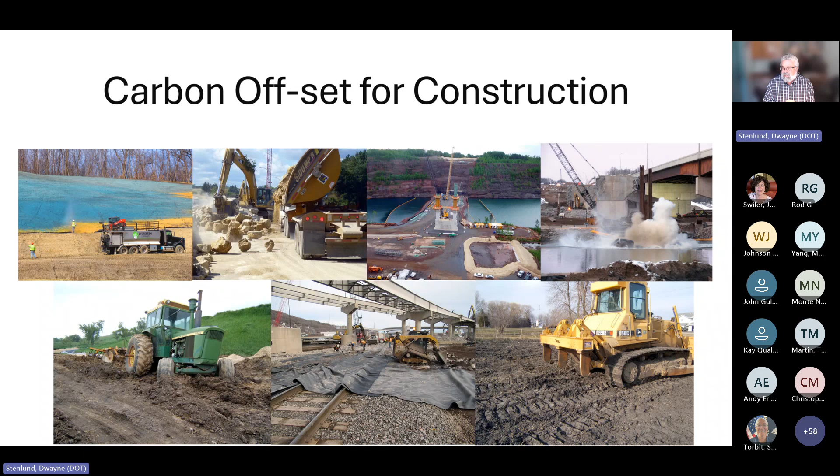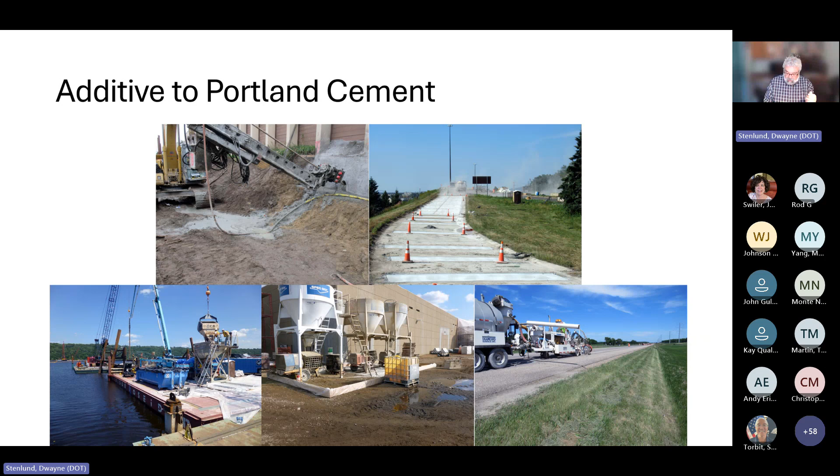And thank you for everyone that's helped me on this. So I'm going to predict in the future it's going to be for carbon offset for construction. It takes a lot of energy to build something. It takes a lot of energy to make Portland cement. In fact, it already is an additive to Portland cement. So it's more than just fly ash as a replacement, but it could be. So it's really fascinating how these chars are likely to end up in pavement, both bituminous, but probably not Minnesota, and certainly Portland cement.

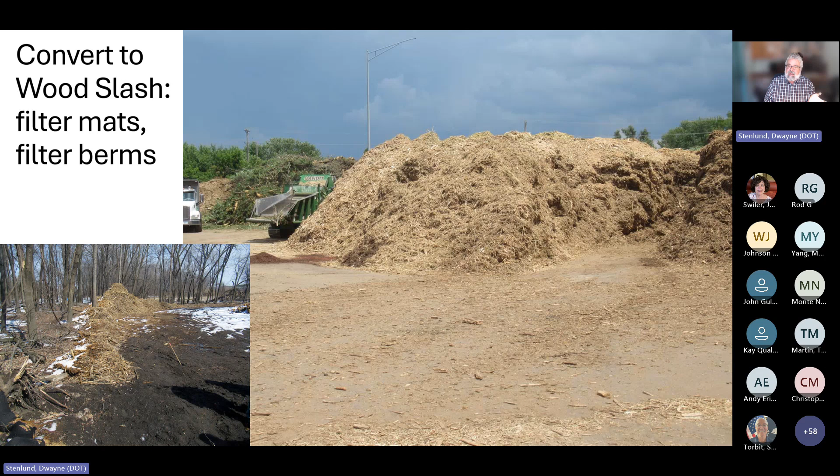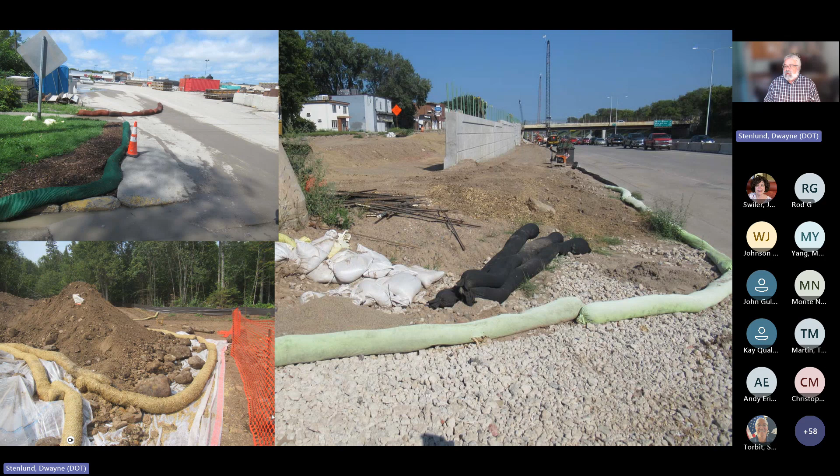So thank you for those that help make this technology available. It's not part of the contract yet, but that's why I need standard material specs. And so the examples of all these contaminated areas is this log back in Moorhead. This is certainly a contaminated soil, and trying to have engineered systems, logs that will treat this material before it goes into a curb gutter, pipe, and water resource. So they could be char checks. And by the way, this one is just for pH. It's interesting what we can do with char checks. So it's got biochar in it.

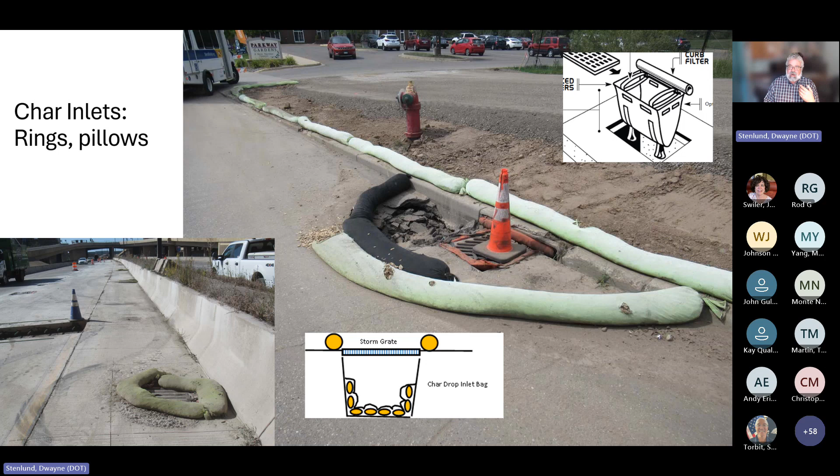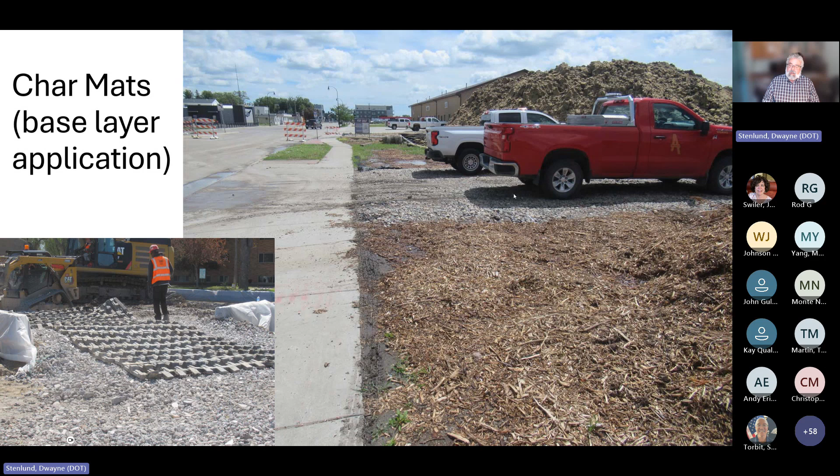Char inlets, rings, and pillows. And I'm hoping that someone will invent for me a char drop bag inlet for these things in the future. Char mats, which would be for our exits. It could be mixed with aggregate, wood chips, or even these engineered systems, so that if it rains, this material is bound to the char. And all of that will eventually be disposed of, but in the meantime, what normally would be just flushing off into the curb gutter would be sequestered here long enough for us to get the project built.

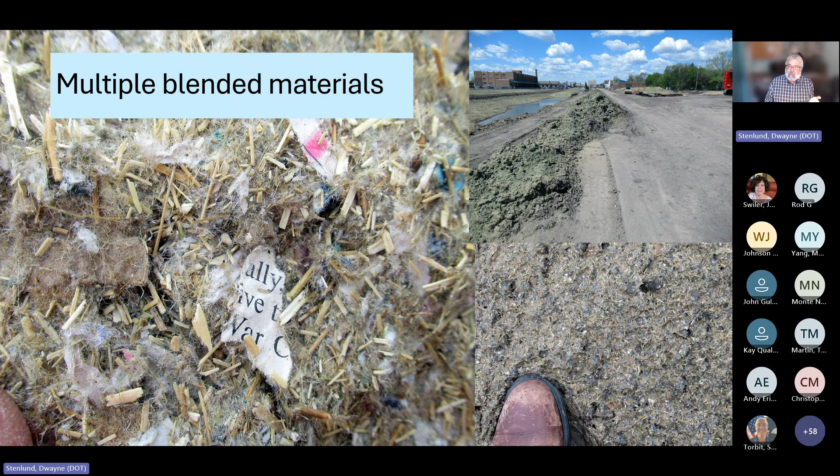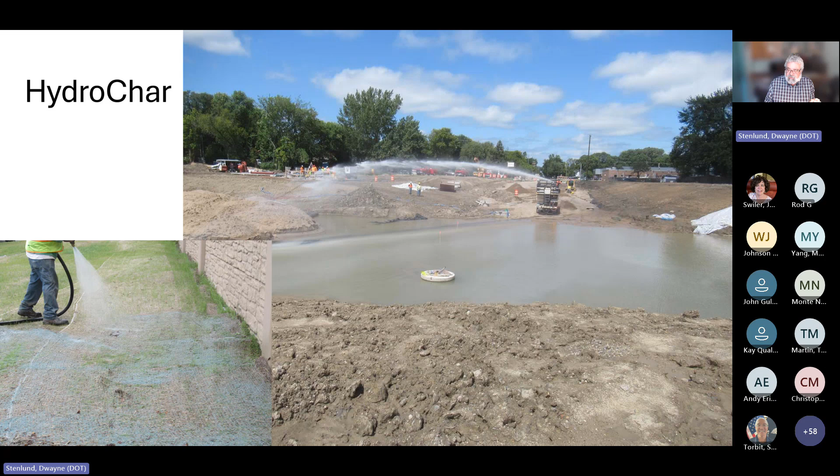It's already being added to char mulches. It's just mulch, but add to various hydromulches. And this is a very good thing. Again, it'll help sequester. There are already multiple blended materials, and why not char in them? And I call this hydrochar. And this might be applied to slopes that have the potential to erode deleterious materials. It might be included in the floc. So I think the future on chars is just amazing.

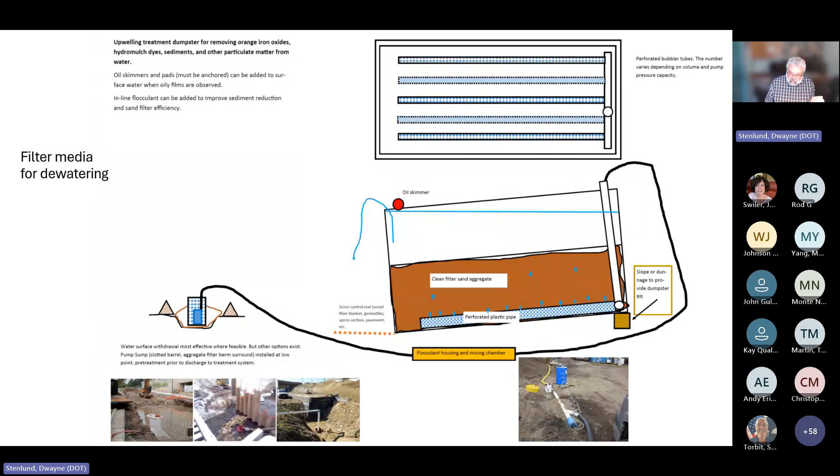Char dewatering for filter material, char synergy with other BMPs, particularly with dewatering and pH neutralization. This is just an example. Certainly added into engineered dumpsters and so on, using char for stormwater quality. It might even be a benefit, with the idea of biofilms and enhancing biofilms and tire-derived aggregates. The future is just ours. And so my real goal is to be able to add a certain amount of char to the inslope to be the first flush treatment of whatever falls off the road.

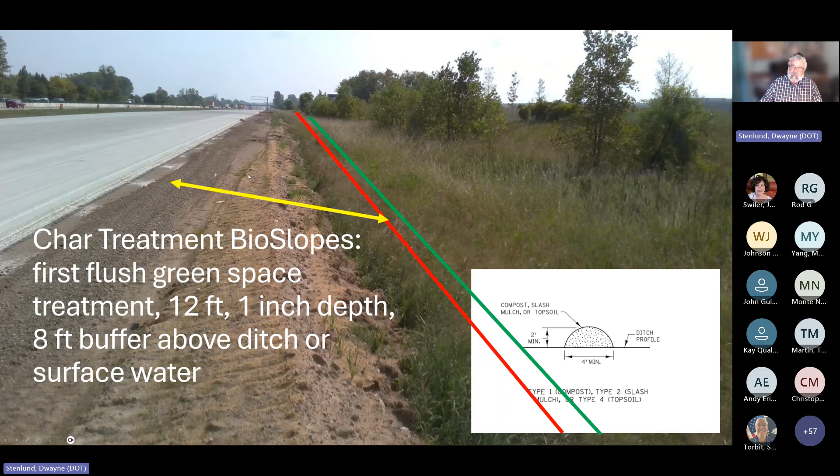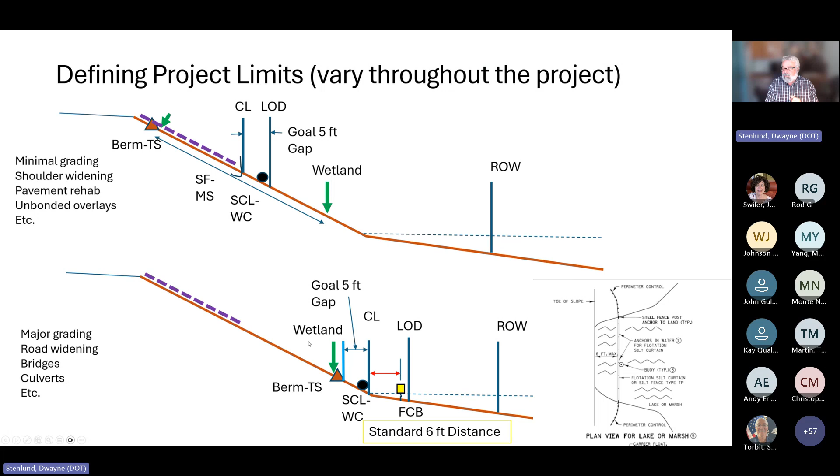Awesome. Thank you, Dwayne, for wrapping us up. And we still have a few minutes for questions. So if anyone has any questions, feel free to unmute yourselves or drop your questions in the chat. And I think, Dwayne, we might have one for you already, from Gladys. They asked, would basalt be useful?

A great question. Salt might be useful for de-icing, but char will likely do nothing for salt, because the constituents of sodium or chloride or magnesium or calcium have to be bound to something, and it's a salt and it freely flows through. That doesn't mean though that we can't create plant roots that the biochar will help facilitate chloride retention or sodium retention, but in and of itself, nothing on salt.

Oh, and I think just to clarify, it's basalt. Oh, yes. So they're asking if basalt would be useful. Well, again, if the question is, will basalt actually store something of concern? Well, then absolutely yes. I think Andy has done a great job on the manual, and we've only just been able to add soil additives to enhance the property. So we already know about iron. We've succeeded on that, iron enhanced sand filters, but sand itself doesn't do much. So we know roots do something, and we know additives.